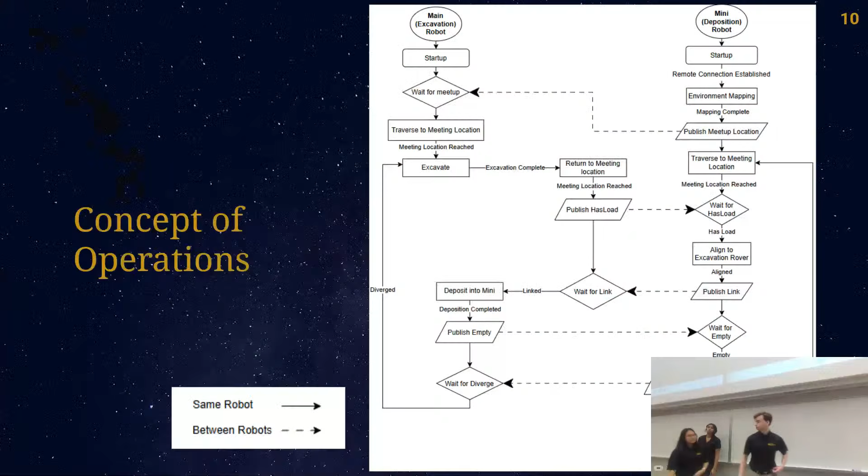Starting with the concept of operations, the reason why we're even doing 2 robots is because one can deposit and one can excavate at the same time. So this flowchart is just a high-level overview to bring what the software is designed for, and how the robots think, to everyone else so they can understand what's actually going on in the robot, as well as for anyone else, specifically NASA, looking at how we built the robot.

To go over the flowchart a little bit: the mini-bot will first publish the meetup location. The main bot will then meet the mini-bot at the meeting location before going to excavate. After excavating, the main bot will meet up with the mini-bot again, and then the main bot will continue to excavate as the mini-bot deposits the regolith into the deposition zone. This will loop until the end of the time.

Next, Systems has an integration plan and risk assessment. This was developed a few years ago, but we continue to use and update it every year. This is a great way for us to map out what we identify as our highest priority risks and lowest priority risks. Some of these are more operational focused instead of being very specific to maybe what a DFMEA does in identifying risks on a certain subsystem.

To go over the highest risks we've identified: shifts in the project focus. Obviously this year with the mini robot, there's a lot of extra work that needs to get done, specifically on integration of the 2 robots. So we identified this as a high risk with the addition of new sub-projects, trying to stick on the same timeline as we usually would have with only 1 robot, but now we have 2.

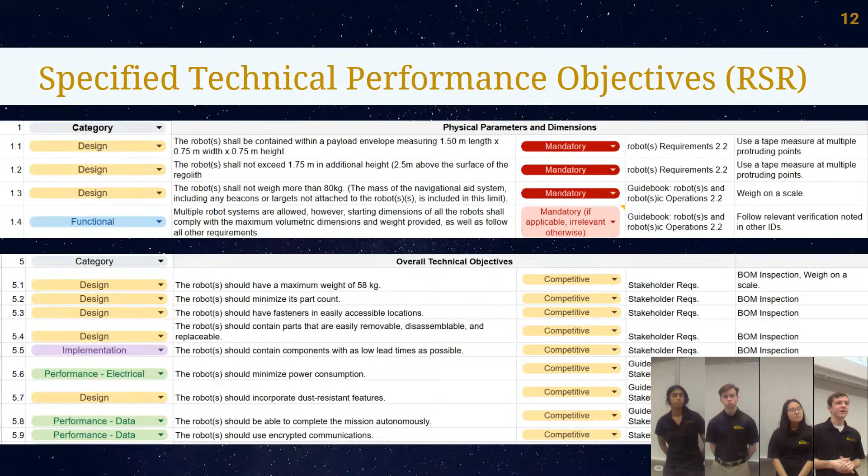Next, we have our RSRs, Robot System Requirements. These are the objectives that NASA set out for us, and we were able to extract and put into this Excel sheet. We also put in our own input and judgment designating them as mandatory or non-mandatory based on what the guidebook says. This is a way for us to organize our thoughts and what NASA wants from us so we don't miss anything. A lot of people have seen these and been looking through them because you need them to fill out the DFXs, checking if a certain part meets the system requirements. These objectives also help guide our TPMs, our technical performance measures.

This is a way for us to take those objectives and make them into a table that we fill out with our thresholds, our objectives for different measures, and the hard limits we have for those. For example, this is the one for the main bot right now. The total limit, as most people know, is 80 kilograms. For the main bot, we're hoping to get it around 50 kilograms so we can leave 30 for the mini bot. This is a way for us to make sure we are hitting those measures and not exceeding them at any point in time.

We update them at most major review points. For example, there's some at PDR, and we're going to have some finalized by the end of CDR for those measures. This is also really important because NASA likes to see how the robot evolved over time in terms of these objectives and technical measures. This is the TPMs for the mini bot.

It's mostly the same, there's a few changes. For example, the dimensions that the robot should be in and the mass. So I'll turn it over.

Currently we are at CDR, and looking forward, we have the test readiness review. That will be where all of the assembly should be finished up so we can hand things off to software to do testing and get that proof of life demonstration out there, which comes after TRR. This is something we will be sending to NASA, a video of our robot. And then after that, we have competition.

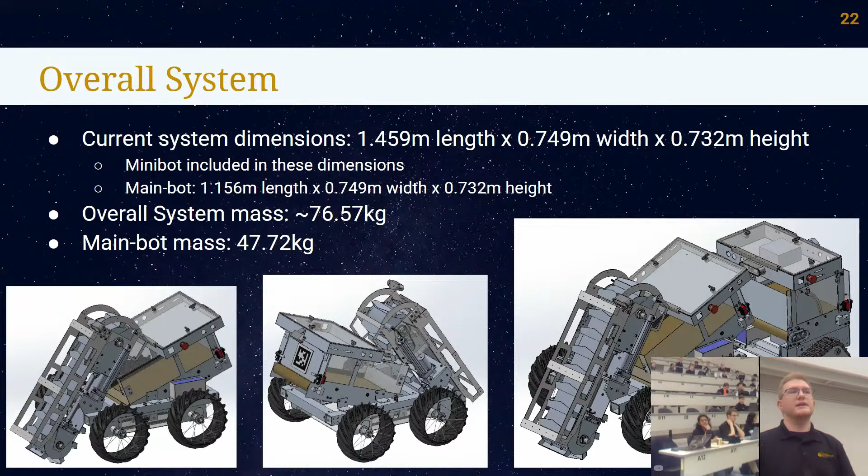We have 3 system configurations for while the robot is running during the arena. This is the starting configuration, so we fit within our maximum allowed stowed dimensions. Next is our mining configuration, where excavation extends downward so we can collect the regolith. And then our third is traversal, where the excavation system is raised up to provide additional ground clearance, and the mini-bot deposition flap, which we'll hear more about later, will open up.

Now I'm going to invite Will Dansdown, who has done a lot of calculations to justify the mini-bot in addition to our main bot. So we're going to talk through that.

Hey everybody. So in an attempt to justify this 2-robot idea, I took it upon myself to try to model last year's robots based upon this year's format.

What we did is I took the sample size of all the teams that qualified to KSC, or the top 10 teams at competition last year. I rewatched all of their best runs, which I determined by taking their total volume deposited divided by the time of the run. So if their KSC run was over 2 times the volume of one of their UCF runs, I would use their KSC run.

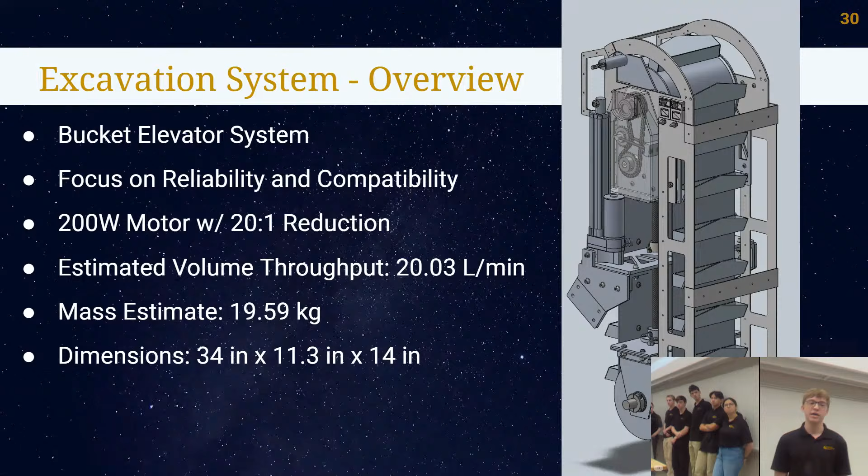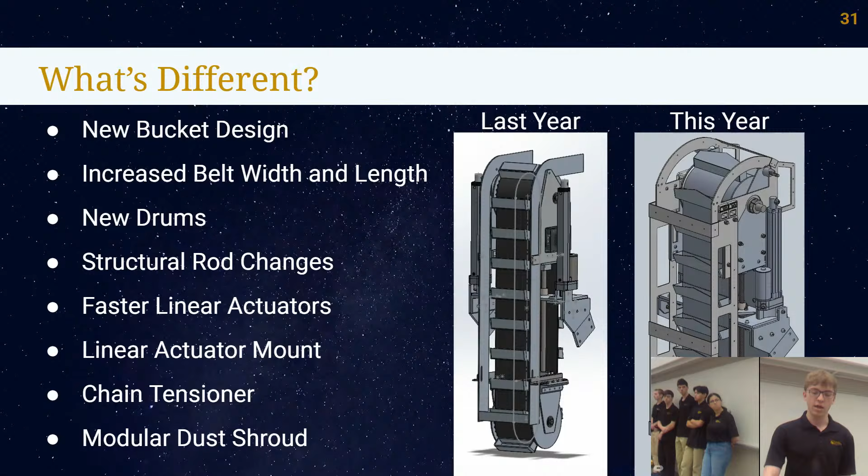There have been many comments that we look very similar to last year's robot. However, a lot of things have changed, such as a completely different bucket design. Our belt width has increased significantly with an increased belt length. We have a complete new drum design, a lot of structural rod changes, and we've implemented faster linear actuators. We've created new linear actuator mounts, changed our chain tensioner design, and updated to a modular dust shroud.

For the new bucket designs, compared to PDR, we decided it would probably be better to have a smaller footprint, and volume throughput is not as important as initially thought. So we decided to downsize the buckets and therefore downsize volume throughput. We also slightly increased the amount of buckets from PDR to somewhat compensate for the volume throughput losses.

The buckets are now still the same size as last year, same cross-sectional size, so 1-inch L channels, which is easy to source, and they're wider than last year. Again, we're estimating about 50% losses, so that's where our 20 liters per minute estimation comes from.

Here you can see the internal dimensions of the bucket, which comes out to just over 0.1 liters for our overall internal volume. These are built with the thicker L channel in the back and then a thinner piece of sheet metal. If you look closely, those pieces are overlapping slightly to help with making our welding easier and stronger. All this comes out to about 0.1 kilograms of weight, so totaled over 18 buckets, that's about 2.04 kilograms and 1.89 liters of total volume.

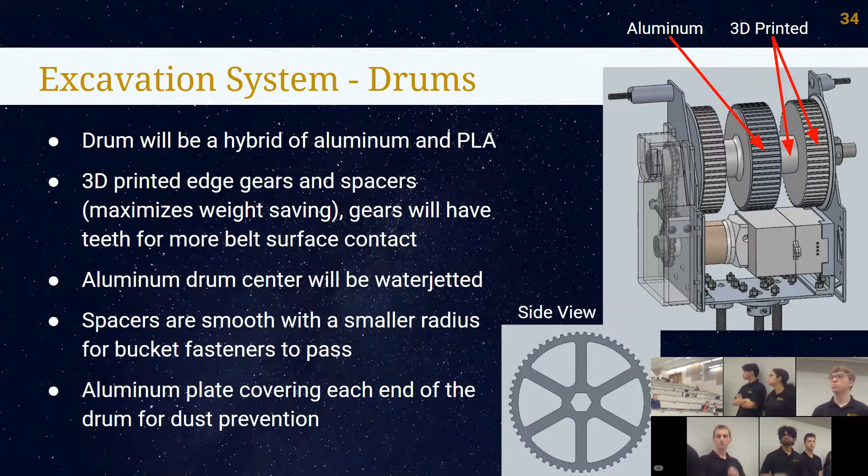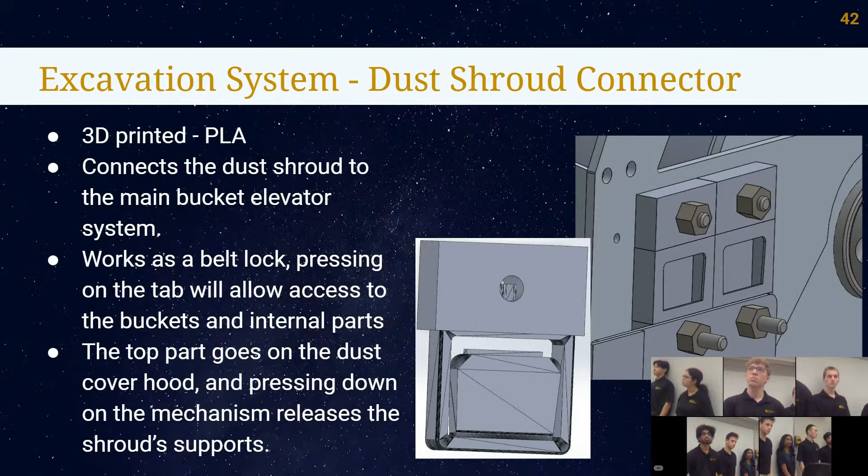I have a question regarding the X rod. I know you were mentioning reducing the weight with carbon fiber. What was the reason against doing that? Was it the manufacturing of it? Carbon fiber for the X rod?

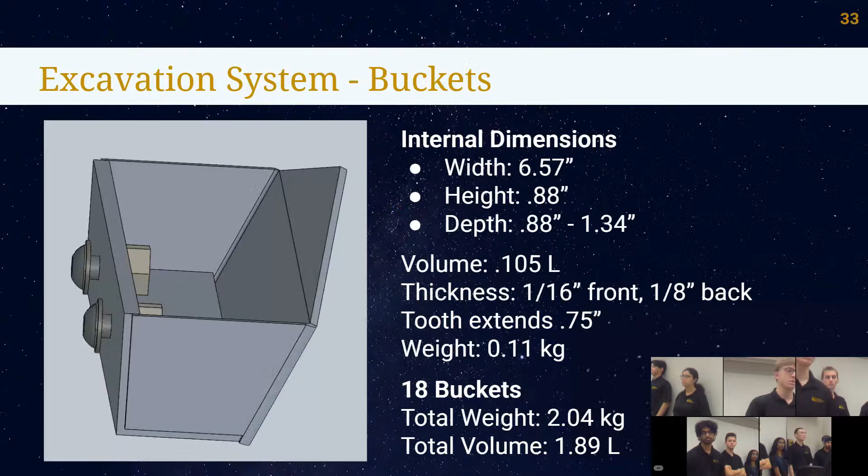The original idea was to make the center part, the X, carbon fiber. The factor of safety is about half of what it would be for steel. This is experiencing especially high force, and we don't want to put carbon fiber under this kind of load. The strut rods run vertically, but this one runs horizontally, and carbon fiber usually isn't good for that kind of application - you don't want to put it under that load. That's why we steered away from it. These two weigh a decent amount because they're steel, but they're sturdy for a reason - this is probably the point where the robot experiences the most stress.

Is this the part going straight into the ground, actuating down? For some reference, I ran calculations, and a 3/4 inch carbon fiber tube I found has about the same strength as a 1/2 inch steel rod, which we already had concerns about bending and breaking over time. So the factor of safety is less, and the data we have shows it's not quite strong enough - it'd be weaker than that.

I think the failure mode, especially when the steel was bending, I can't even imagine with carbon fiber where it starts cracking - that's a lot more of an extreme failure mode.

I have some questions from Julian from the Slido. First, how are you getting the motor in? It doesn't look like there's any holes inside. The motor, I believe, we will attach and put onto the plate prior to assembling the two plates together, so we'll be putting the motor onto the plate prior to assembling the top drum assembly.

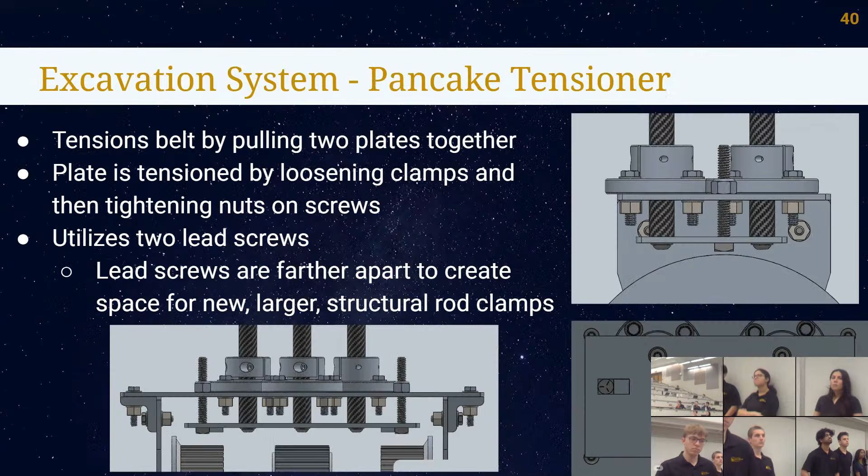Kyle, you've talked a lot about using carbon fiber tubes for things. Have you looked at using steel tubes? Yeah, we actually have, for the strut rods we're just trying to save weight. I do have factors of safety in my spreadsheet, including a factor of safety for a steel tube. It's just for the sake of weight saving that we've started applying carbon fiber. We've gotten to the point where we're looking at putting weight-saving holes and doing random things to shave weight, so it's been a battle for every gram.

Yeah, obviously I'd be more comfortable using steel than carbon fiber, especially when stress is applied, but it's just been a challenge. I would personally be a little concerned about using carbon fiber tubes in compression here, because carbon fiber kind of sucks in compression. Yeah, these aren't tubes for the strut rods, they're solid, but yeah, I agree.

Yeah, I can share with you the Excel. The factor of safety was actually fine too when it was like a tube with like 1/8 of an inch wall thickness, but these are solid for now. So yeah, I agree with your concerns. These are concerns we've been thinking about since we began thinking about using carbon fiber. The calculations show that we should not have issues. However, Sophia can send you the calculations to ensure that.

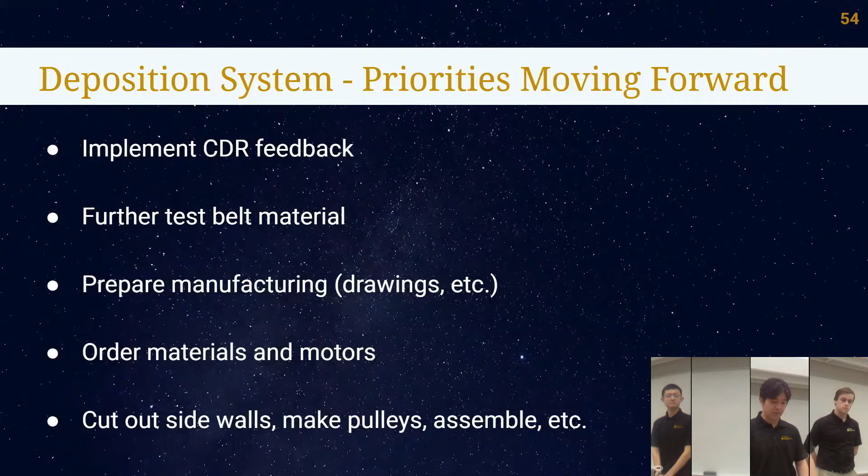Are there any questions? From your dust sealing, you've got little rubber beads. Are you concerned about extra friction added to the belt? Not particularly. Potentially, but the rubber is only a 1/16 of an inch thick, so we don't expect it to generate a large amount of friction. And even if it is, the belt is not the most sticky thing in the world, so hopefully it should be fine. And if it is, last year's testing showed the motor was not drawing particularly much power to actually turn it, so even with a little more friction, I don't think it'll cause a larger problem such as a motor stall.

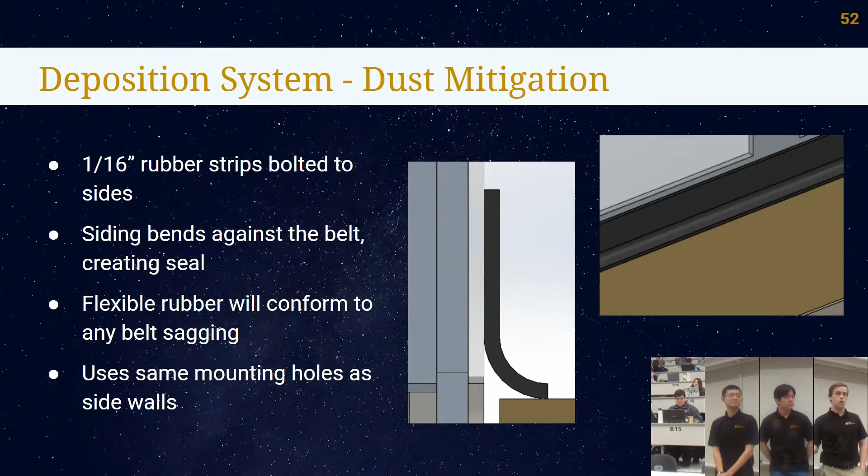And on your chain, how are you planning on tensioning that? The chain is planned to not have an external tensioner. We've just spaced them very carefully such that there is slightly less distance than would perfectly take up the links. This shouldn't be a problem. Worst case scenario, given how much wrap angle there is, even if there is some sag in the chain, that just means there's a slight delay between starting up deposition and it turning, and we don't foresee this to be a large problem.

Are you concerned about it being too tight and being unable to put the belt on? We can double check, but right now that hopefully should not be a problem.

Going to the gate, how much force is it going to take to open this gate, and have we tested it, or are we concerned about that? So we have tested the gate, not obviously in its full design, but as much as we could based on last year's system, and it seemed like the regolith had no problem pushing open the gate, even when we tilted it as much as 30 degrees.

Is that going to affect how much you can fill deposition during excavation? Hopefully not. This is the same basic plan we've had the whole time, in that the gate will be held closed and the regolith will still be able to pile up against the end of it. We have latches holding the gate closed, we pile the regolith, then we open the latches, and the belt pushes the regolith so the regolith can push the gate open.

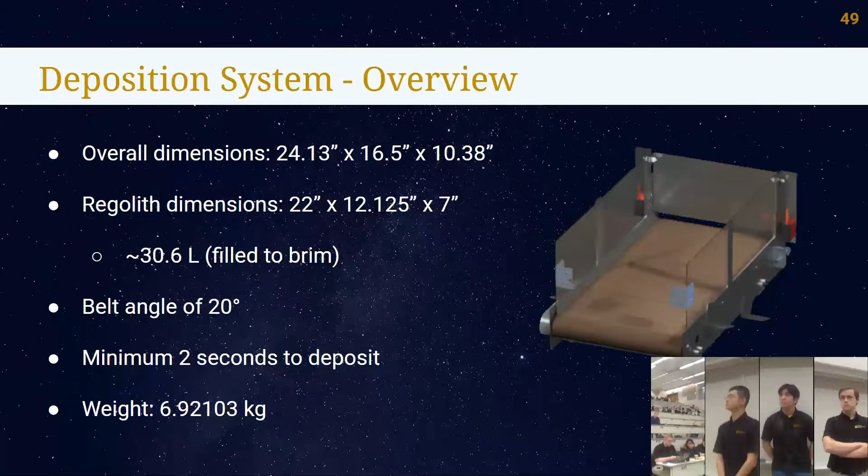Another question: whenever I think of the conveyor belt moving with the deposition at an angle, I foresee it becoming an issue that instead of it piling at an angle, it ends up piling in a triangle fashion where it levels off at the top of the conveyor belt. Is there anything that would cause the material to actually come up to fill that gap?

I can actually answer this. We did do a fair amount of testing with our old robot, Reggie. The belt angle was 20 degrees, and we tested up to at least 45 degrees on Reggie, and the belt just stayed the same shape. So not the same performance with this cotton fabric.

With the cotton fabric, that's one of the things we need to test about this. There are ideas on how we might apply various coatings and sealings to increase its friction if we find the regolith is slipping on it, although I don't suspect that to be a large problem.

I think what you're saying, in short, is that you don't see how it would pile up vertically any higher than where the conveyor belt is. So the answer for that is just going to have to be the motion of it being pressed up against the gate, inherently pushing in more underneath it, which then lifts more stuff up, and more regolith comes in underneath, lifting it up, and then it falls backwards and fills the shape. That's another thing that really needs to be tested.

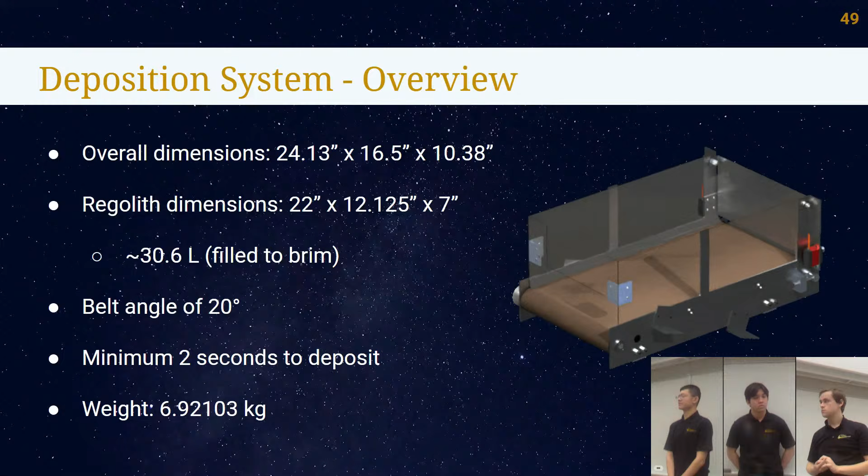I don't think we can know sort of how the regolith will behave in that manner. There's also the idea of running the belt just a little bit slower to distribute it a little higher.

Question from the Slido from Julian: did the deposition gate use a solenoid instead of servos? Potentially, I don't necessarily see. I can't think right now of where the solenoid would be placed, or necessarily what the benefit of that might be as compared to the servos.

We can look into that after CDR. I'm having a hard time understanding where the solenoid might be in this moment. I imagine it's like a latch or something, like it just extends and pushes out. That's like a space thing too.

We could maybe. The good thing about the servos is that they're quite compact. We might have to expand the bars more out to the side in order to fit the servos, or fit the solenoids, or make some other sort of mounting. I imagine the driving requirement might be mass.

For the gate, is there anything to prevent the regolith from slipping underneath the gate and out the back of the robot? I've thought about potentially taking more of that rubber siding and slapping it on the bottom to try to make a seal, or just having a tight clearance. Even if it does slip under, we suspect that the amount that goes underneath would be quite small.

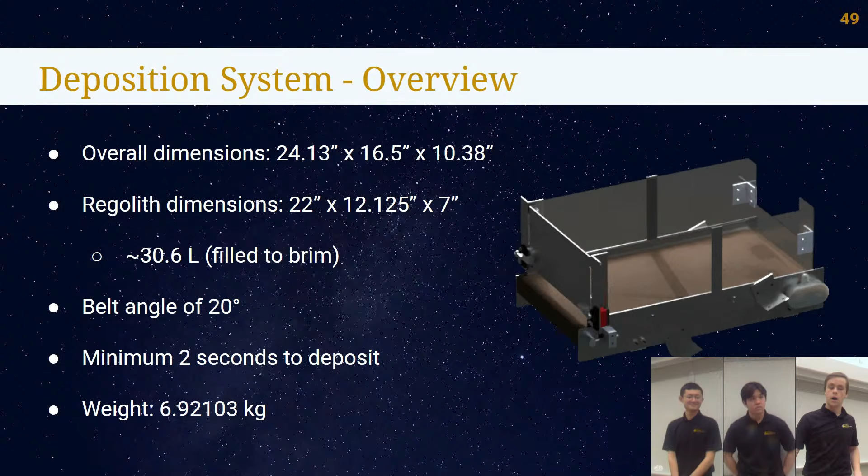Yashas asks: How are the servos mounted? Sorry, it's hard to see. This might be an old image, but there are 4 M4 screws that hold them in.

Sophia asks about our pulleys' weight. I think a little bit less than a kilogram each. Yeah, the pulleys are pretty heavy.

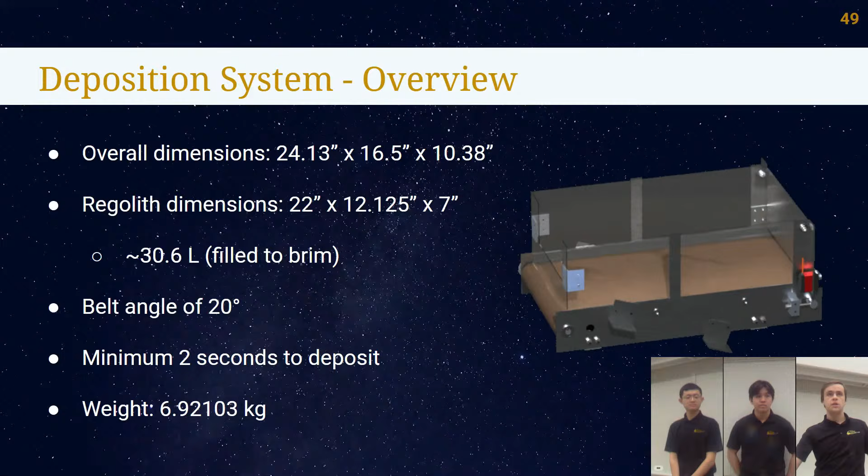We're going to try to look into some more potential weight saving for that by trying to reduce maybe the inner diameter. It's hard - the pulleys are very important for the system, and they're just necessarily long tubes of something, so that's a lot of volume. So we're looking into ways to try to reduce the weight cost from that.

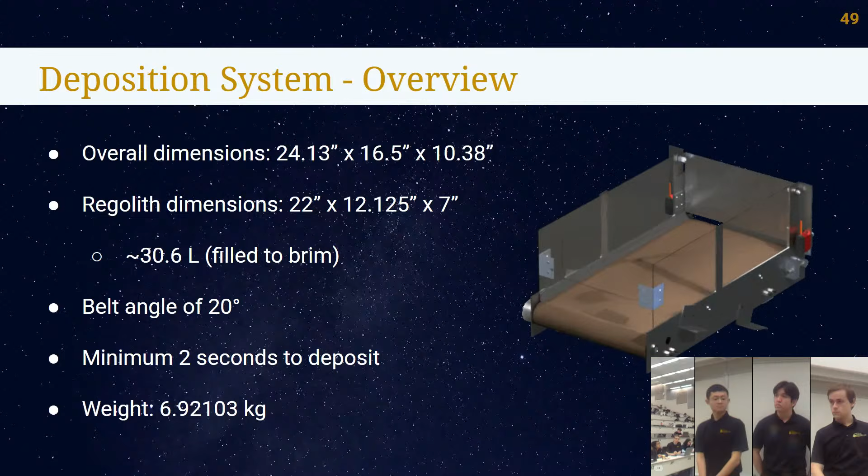Also on the pulley, I believe you talked about PDR, but I believe you were planning on making those pulleys convex or concave. Yes, convex. So the pulleys are no longer to be actually properly crowned, meaning they will not have an arc on the radius.

They're instead going to be sort of trapezoidal pulleys. So there will be two straight parts going into the cross section on the outside, sort of a trapezoid, which wildly improves manufacturability of these pulleys.

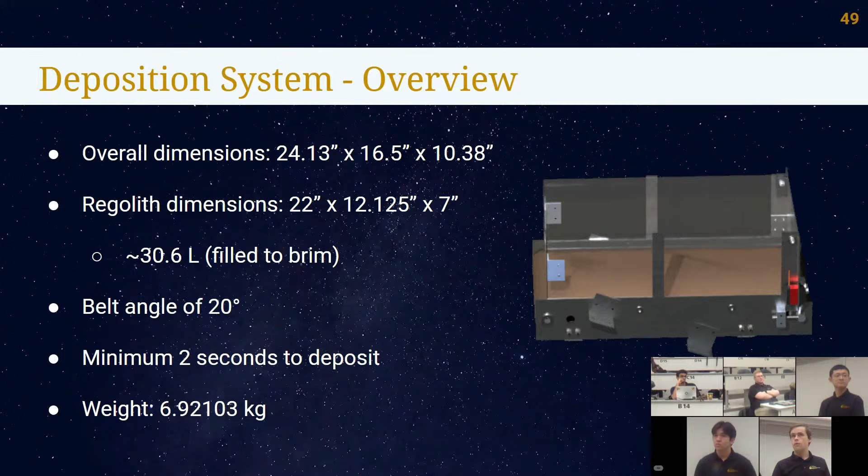You plan to manually make them? Well, right now we're still debating between manual and CNC processes. Potentially either, depending on what's more available to us at the time.

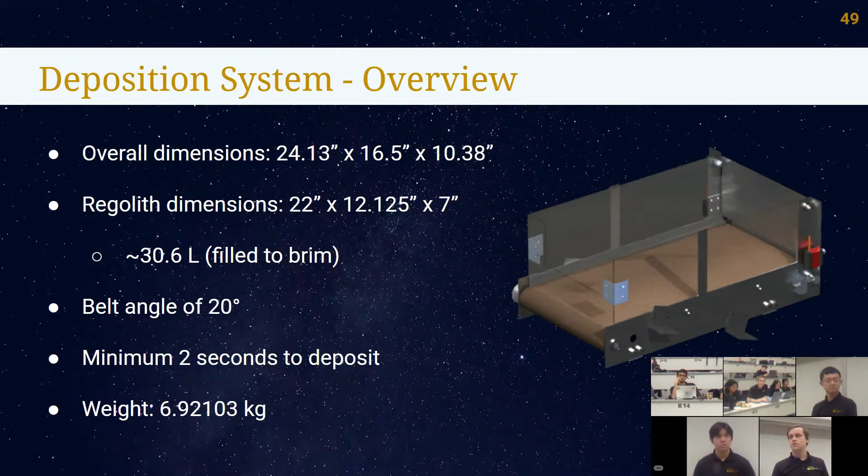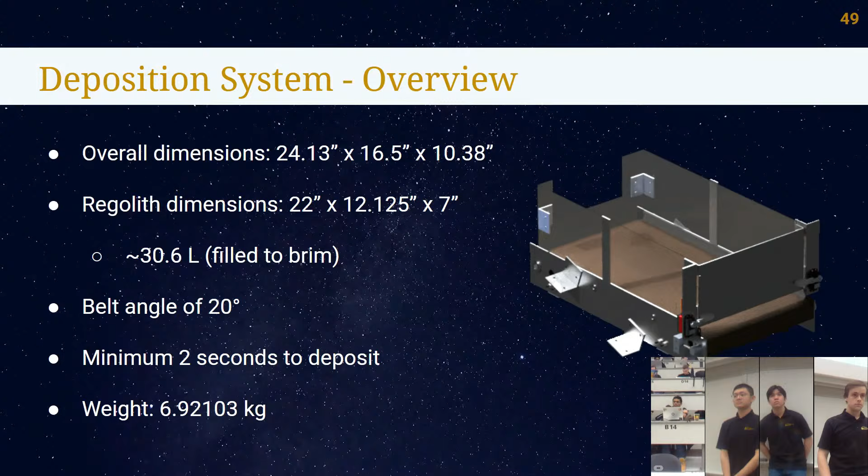Is there anything else for deposition? Yes. Are you concerned about regolith out from around the gate, or is that small enough that you don't care? I don't think we're too concerned about regolith leaking out from around the side of the gate.

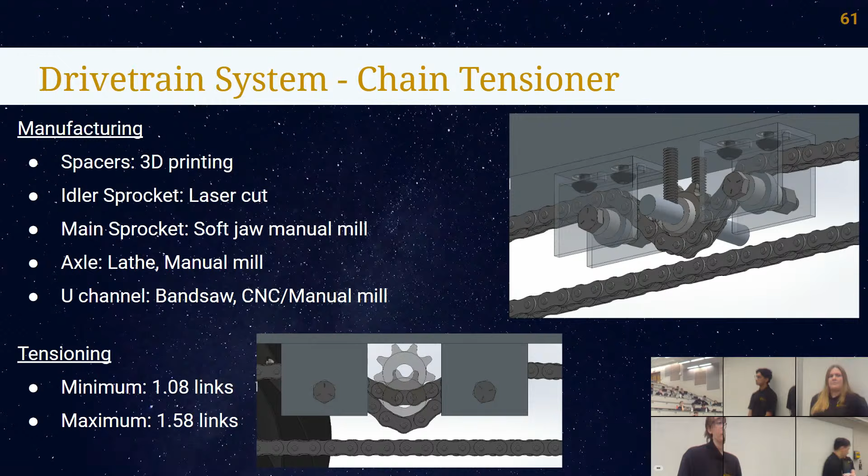What's your question? Could you provide some more information on the guards for this? That includes the chain guard - the material, thickness, dimensions, how it's manufactured, how it's mounted - as well as the skid plate.

So we did not have a slide for that, that's probably something we should have added. The skid plate thickness is 1/8 inch polycarb, made either with water jetting or laser cutting, both would be possible. For the chain guard, we'll also use 1/8 inch polycarb, either water jet or laser cut. For the 90-degree bends, what we discovered last year is if we use a heat gun to heat up where it will be bent and then bend it, we can get much more accurate bends, and they don't get cracks and pressure points in them. So we'll do that process to bend them at the different marks for both sides.

Those were the two things. Was there another one you mentioned? Yeah, where are each of those mounted?

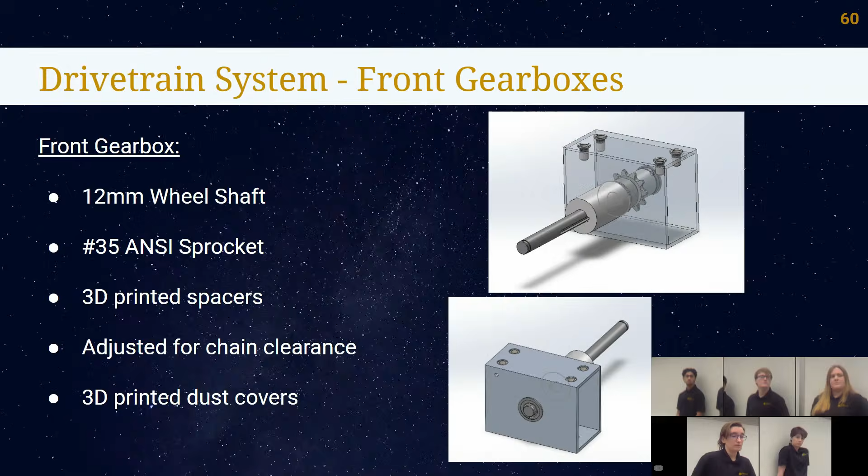Okay, so the skid plate is mounted - does the mount show up on there? Yeah, okay, so the skid plate is mounted to this hole down here, and that is mounted to the front and rear gearboxes. And then the chain guard is mounted to these top two holes. For those who remember the Masterlink issue from last year, the screw that was switched out was too long - it was for top and bottom, but it was the bottom screw that was breaking the Masterlinks. So by removing those holes and making sure only the shorter screws can be used in that spot, it should completely remove that issue.

Alex: two things. One, I sent that one of the rod nuts is 60 thou away from the chain.

In CAD, very close. That'll warrant more investigation. Yeah, I'll look into that. I sent photos and drivetrain.

The other thing is, so to my understanding, the skid plate will run entirely underneath the robot, including underneath the chain guards. The skid plate does not run underneath the chain guards. The skid plate has a cutout section here for the chain guard to fit in. So when the chain guard and skid plate are next to each other on the bottom of the robot, they'll be parallel and look flat, but there's a cutout section for the skid plate.

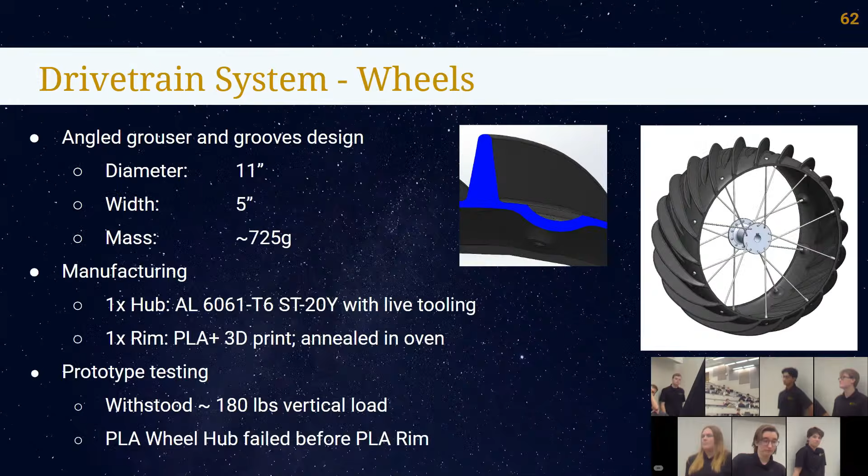I still don't believe tolerancing will be an issue, but when we manufacture them, we will definitely have to be very careful of the tolerancing, as well as in the manufacturing plans, which I know aren't on any of these slides, and I'm probably the only one who's read them so far. Oh, I don't know what I hit. I'm very sorry.

In the manufacturing plans, we do leave plenty of time for these to get done. So if we make them and discover there's a tolerancing issue, we would remake the part.

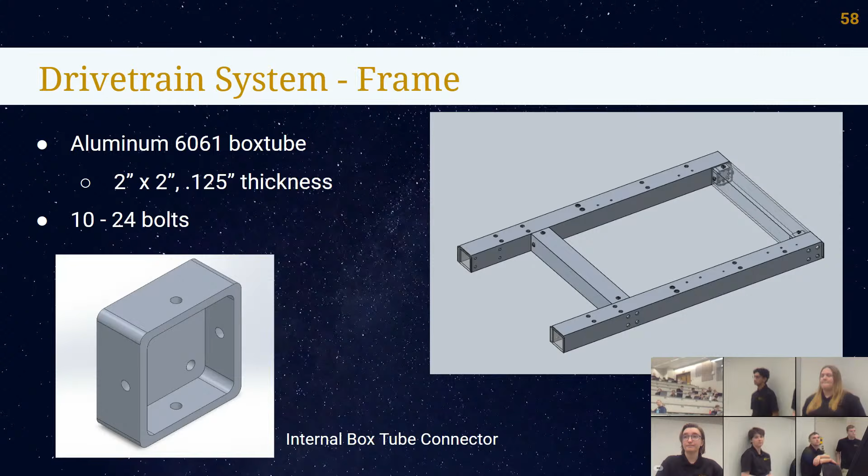One more question, then we'll move on to power and hardware. Okay. Did anyone else have their hand raised? Question: what material are the handles going to be made out of?

The handles physically will probably be PVC, because that's very easy for us to adjust. If there are concerns about PVC bending, we can look into other things, but personally I don't think there will be. I've done a lot of very heavy things with PVC pipes and never had them break on me, unless they froze — but that should not be a concern in Florida.

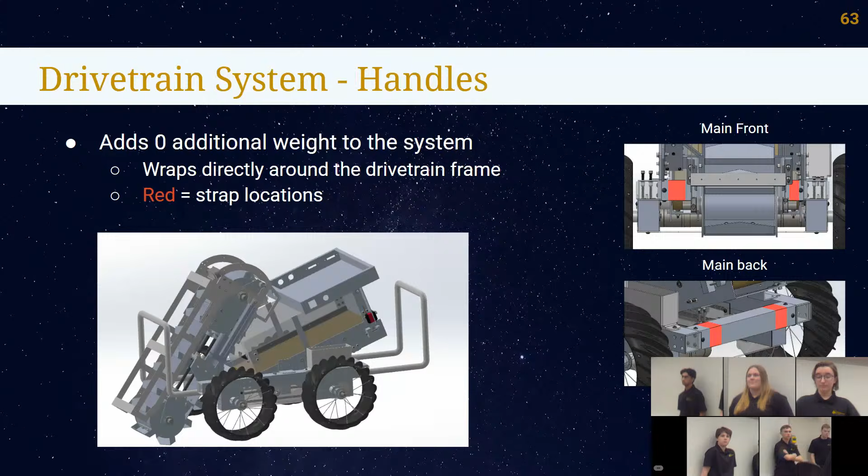Okay, alright. Thank you, drivetrain.

We got the debate. We are the strongest, the Power Rangers. Power and Rangers. We got the pictures of Homelander. I'm so disappointed. Okay, we also have — okay, hello, we are the Power and Hardware subteam.

The basic overview of what we'll be going over is first, system architecture, then our PCBs, and then general box design.

The basics of system architecture: first to note is that we're using a 10 amp hour battery, which is sized down from last year's. This is good for weight saving, and we double checked with numbers from last year that this will be sufficient for us for the main bot. The main thing to note is that as per regulations, all the power flows through the E-stop and the battery is monitored through a power meter. Other than that, most of the system architecture is dedicated to making sure that our power is safely and effectively given to all the sub-teams that need it.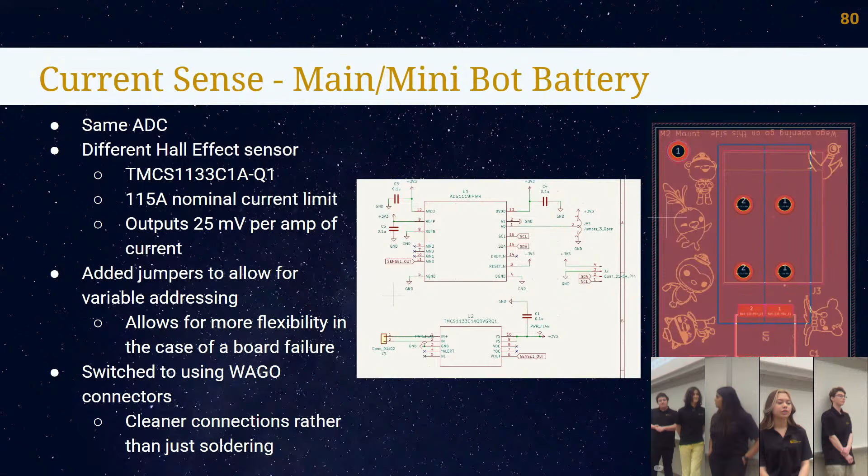This is our alternate mini and main battery design, which is a shunt resistor based system instead of the Hall effect. We're using the INA254, which has a 75 amp nominal current limit and outputs 40 millivolts per amp. Same as the last one, we're using Wago connectors and jumpers.

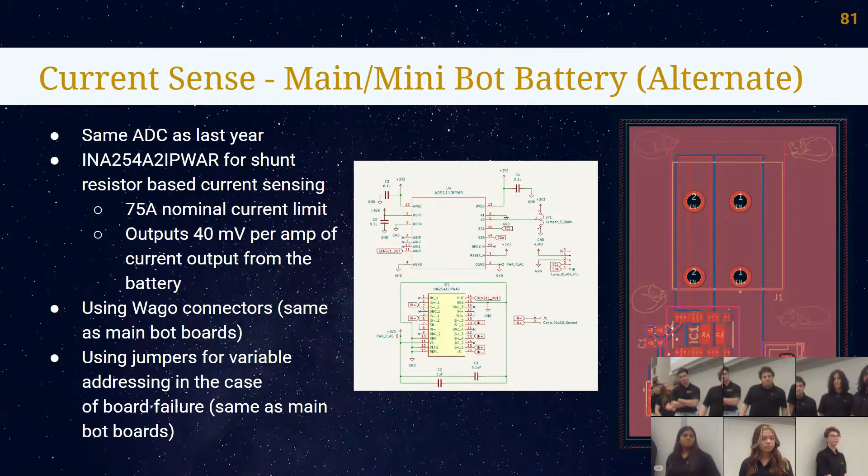We also have current sense boards for the linear actuators on the main bot. This is the design we plan to move forward with. It's essentially the same current sense board as last year, using the same ADC and same Hall effect sensors, and the same Wago connectors for power wires as the battery boards. We changed the I2C address on the ADC since there will be two current sense boards on the main bot. Otherwise it's essentially the same board as last year.

Similarly, we have an alternate design using shunt resistor ICs for the linear actuator current sense board as well. We do not plan to use this board on any bot, but it will be ordered and manufactured just in case something goes wrong with the planned Hall effect sensor based design. This uses the INA250 A2 IC with a 15 amp current limit. That's really the only difference between this board and the other one.

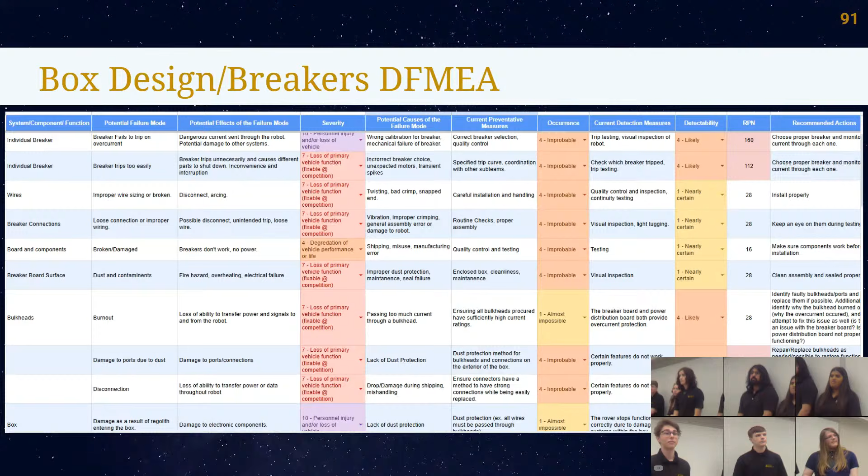Yeah, I had a question about your breaker. Let's start here. What is connected to which breaker?

Each breaker has the same footprint, so it doesn't matter which of the current ones you choose during soldering. For example, the top one could be for the actuators and the bottom one for the software computer. I'm concerned about what is connected to each one. Are we running all the motors through one breaker? I don't know what is running through any of the breakers. What downstream components are being powered right now? It's just both actuators at once, since I assume they're both being powered at the same time, and the power to the software computer.

Which breaker is covering the software computer versus the actuators? Bottom breaker is software, so these two. Size-wise, the 5 amp versus 10... sorry, 10 versus 15. The 10 amp is for the main bot computer and the 15 amp is for the actuators.

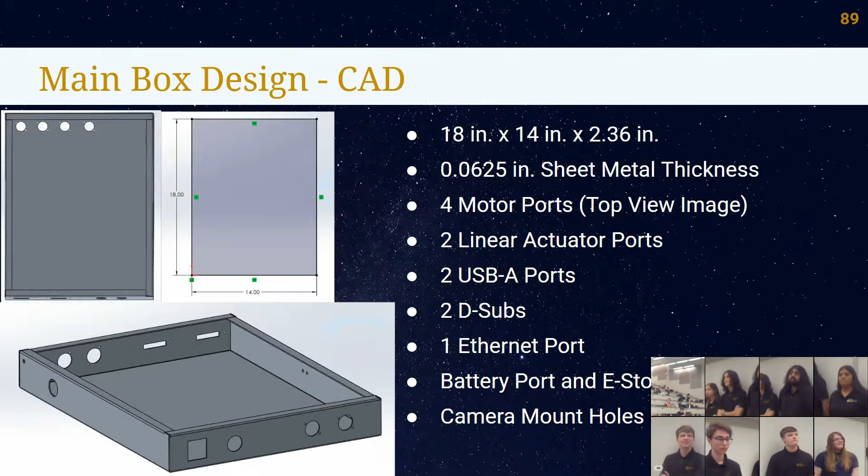Another question from the Slido, from an anonymous user: they see a lot of undersized power traces that should be zones, mainly on the battery protector. I wish I could tell you that... I also have the same concern. On battery protection, to my knowledge, all of the robot power has to flow through the battery protection circuit. Not a single one of those traces is sized to carry the 30 or so amps of the entire robot at full load. This one is better, the other one has super tiny spindly traces everywhere. And I am very concerned, as is the anonymous commenter, about your traces burning.

I was planning on fixing that trace. I didn't get a specific size of the traces when I first made it, but I'm doing more research on that. We're going to make the traces a lot bigger and possibly make the PCB slightly larger, and also have a ground plane to dissipate the heat a lot more and handle the power better.

I am more concerned about this when it goes on. There appear to be unrouted traces in the core. You cannot see them from here, but if you zoom in on the slide, there are a pair of unrouted traces.

I assume those would be fixed. Yeah, at some point. Also, there are two battery protection circuits. Are we using both of them? Are we using both in series or in parallel, or are we only using one? If we're only using one, which one are we using? For which battery protection? There's the 555 timer and there's the BQ series. Which one are we using? Are we using both, or just one?

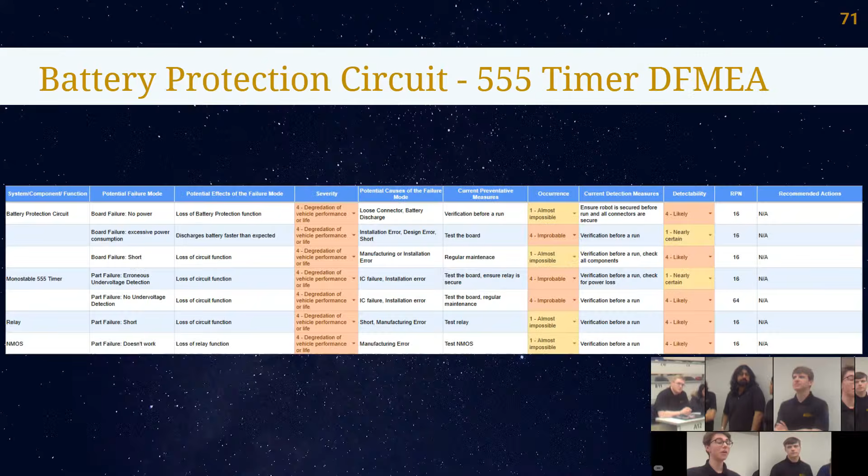We're planning on manufacturing both and testing both. What it comes down to, which one we typically are going to use, is going to be down to testing. In theory, it would be the BQ77915. But again, we are planning on manufacturing both and testing both, and things can happen during testing that we can't predict, and we might end up using the 555 timer. But that mostly depends on how testing and manufacturing goes for both of them.

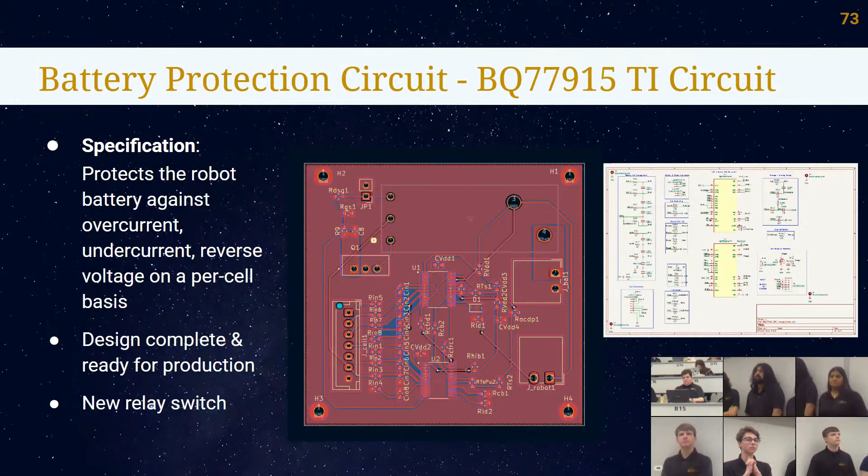For the box design, we are required to have external antennas, so I would definitely recommend adding those as we move forward.

In regard to pre-planning where all the holes go before we send out the box, with all your alternate board designs, would all the mounting holes be in the same placement, or would we have to plan for variable holes? Yeah, that is another reason why I might hold off on some mounting holes. I can see the merit in adding some of the more firm ones beforehand. For example, potentially the 24 to 48 converter, we might be able to add mounting holes beforehand for that, because we know exactly what we're going to use for that, and the dimensions and whatnot.

We do have what we plan to use set, which is the Hall effect sensor for both the actuators and the battery. So if we really wanted to, we could plan for those holes, but to my knowledge they're not the exact same size — someone from Current Sense can correct me on that. The Hall effect versus shunt, they're not the same size board. No, yeah, they're not the exact same size. So again, I might want to hold off on that.

I was personally part of the post-drilling holes last year. Obviously it is a little bit of a pain, but it's not undoable if we do need to add holes after ordering the box. It is a pain, but it's 100% doable. It's not the biggest pressing issue we would have, but it would be nice to have it beforehand.

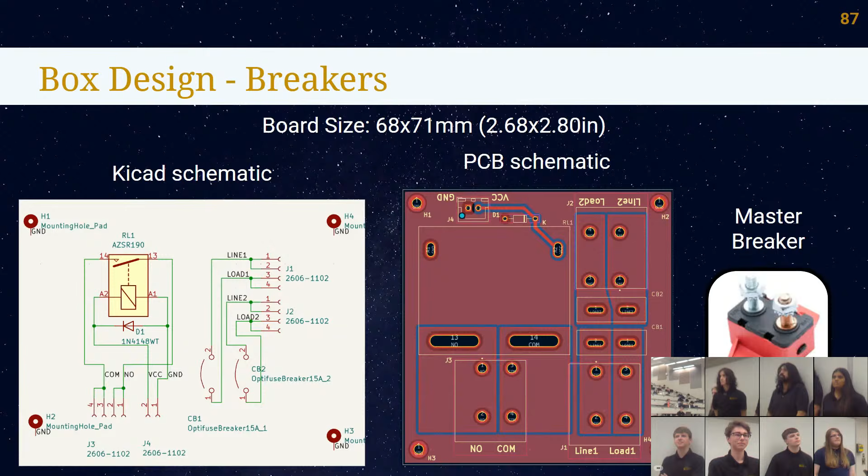I have a question about the PNC board. You mentioned using a 24 volt to 5 volt adapter on your schematics, but you don't mention it here. I assume that is powering the PNC or the peripherals around the PNC? The PNC is powered by the USB cable.

How are you ensuring that the 5 volt signal from the Jetson and the 5 volt signal from the 24 volt to 5 volt converter do not mix and can never mix? It should be fine — the 5 volt signal from the Jetson should be coming through the USB. I believe the traces are all separate, but I will double check to make sure. I appreciate the concern — that's how we blow up Jetsons. Yeah, of course. I'm almost positive that I accounted for that, but I'll go through and double check to make sure.

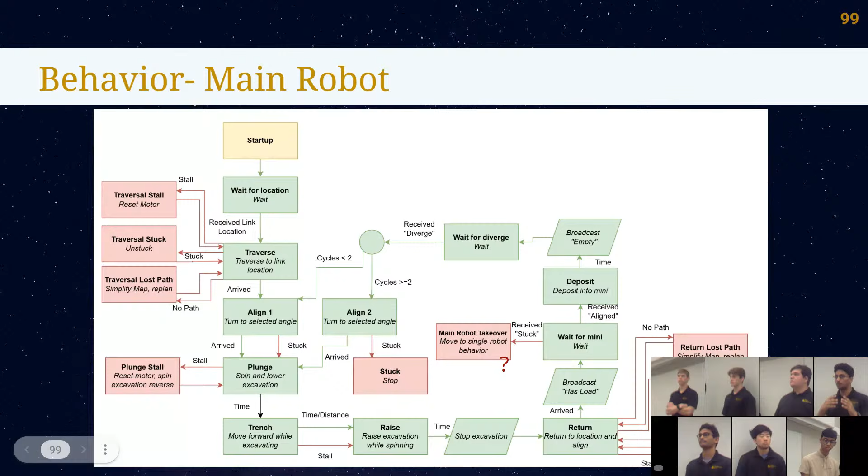One more question: the camera mounting, you have one on the back and one on the front. Yes. Where are your blind spots? Yeah, so the blind spots would be on the corners essentially.

We don't expect this to be a major concern with this robot because it's going to be staying in the excavation zone, where we're allowed to essentially hit the obstacle. Hitting obstacles doesn't lose us points as it would with traversal. Additionally, it's going to be moving fairly slowly — it's not a very fast machine. So we wouldn't be concerned about turning into an obstacle and going very fast into it or anything.

Okay, so given that we don't have this LiDAR yet, are we going to use it this year? We still anticipate and are hoping that we'll be able to use it, but we're not relying on it, and we'll talk more about that. LiDAR is actually only going to be used on the mini.

Process. Curious what that looks like.

So I think it would behoove us to do some pretty preliminary analysis and print out an explicit flow chart: this is the state, this is the decision we should make. So that in the control room, if and when something goes wrong, we don't lose any time in discussion. We just look at the flow chart and go, this is the state, we have to do this, we've done this.

I think this would be a great thing to work with systems on. Any other questions?

So what is this wait for mini on this main diagram? Is the main model fully stationary during that position, or is it actually moving while guided? We'll have a lot more details on that when we get to the minibot section. Basically, during the link-up procedure, when they get close together, we take a lot of steps to make sure they're not moving at the same time, because we really want to avoid them hitting each other. There'll be more details on that.

A question from Eric Reiners in the chat: what is the location accuracy between the two bots? That is still yet to be tested. That's still something we have to work on with two separate systems, testing that, but hopefully coming soon.

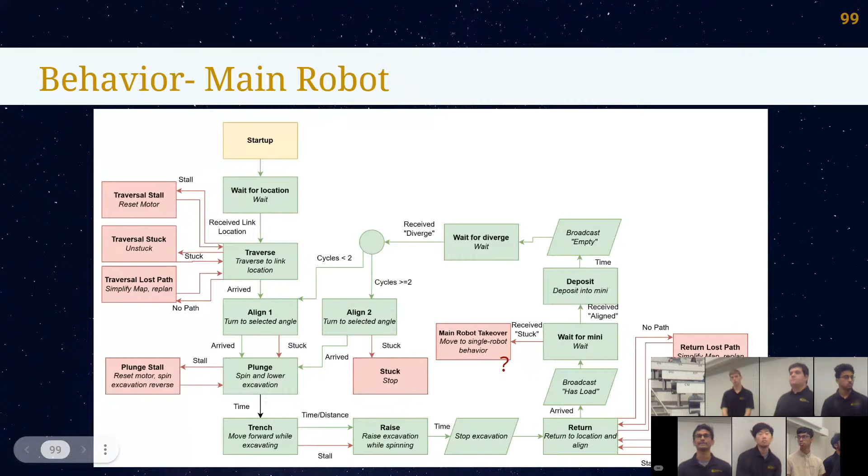One more question about YOLO. We know that Jetson is fairly limited in terms of processing power, as you've demonstrated in iso proc and also just many times incrementally. Where do you find the processing power to run a YOLO model on? Right, so Isaac ROS actually has packages to run YOLO models and machine learning that people have had some success running on a Jetson Orin Nano. So we were kind of using that as inspiration, like, if they were able to get it working, why not see if we can. It's still up in the air and will depend on our final testing, but that was kind of the impetus.

Also, the minibot would be doing the primary mapping of most of the obstacle zone, so it has a much more powerful computer. That is where the processing will likely go.

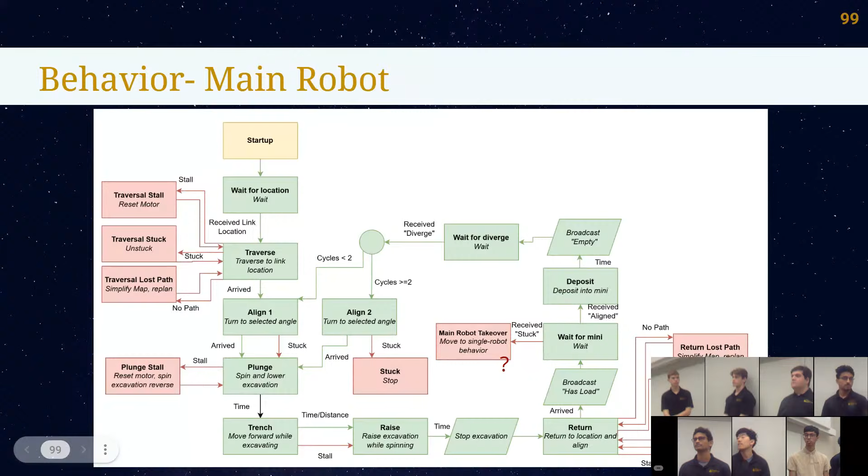That's it, I think we're done. Hand it back over to Hans. Thank you, software.

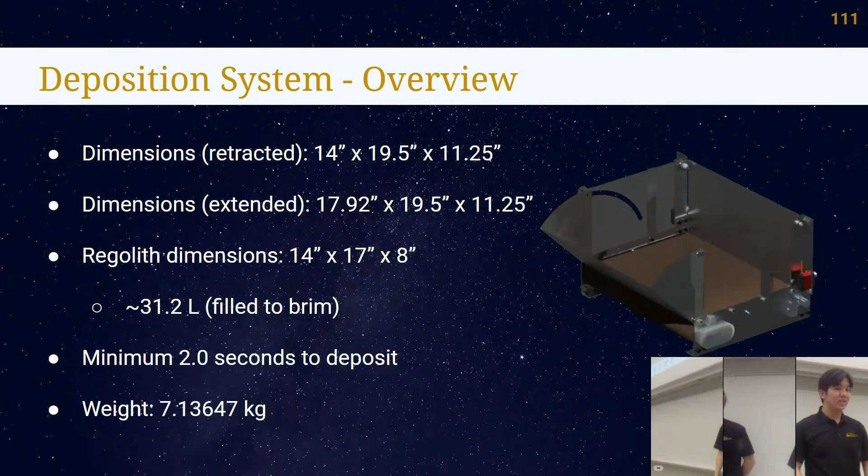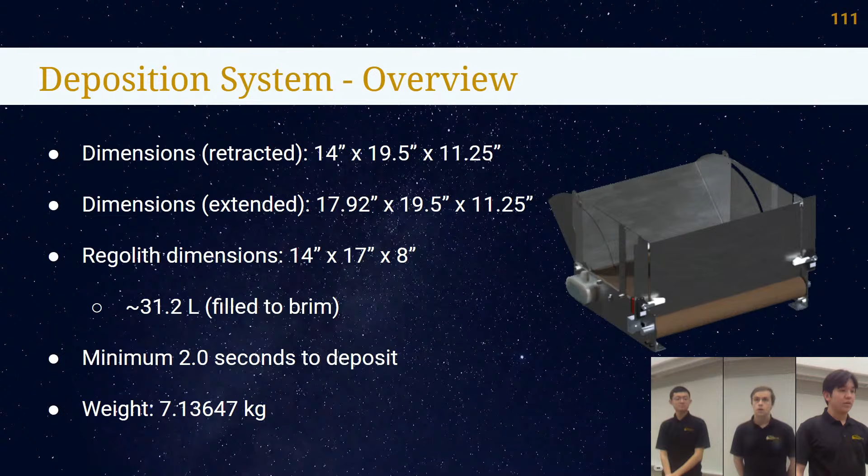So the dimensions kind of vary depending on if the door's retracted or not. The retracted dimensions are around 14 by 19 by 11 inches, and when it's extended that length goes up to 17.9. It can hold up to 31.2 liters when filled, which is a little more than the main system, and takes around 2 seconds to deposit. The overall weight is around 7.1 kilograms.

As mentioned, the deposition system has a flap which will extend at the start of the match. The flap is going to pivot around at the front to fold open and expand our carrying capacity. As you can see here, this is the flap retracted, so this is how the robot's going to start, and then a rubber band will pull the flap open into this position, where it will remain for the rest of the match, following a 68 degree arc, and it's going to end 45 degrees outward.

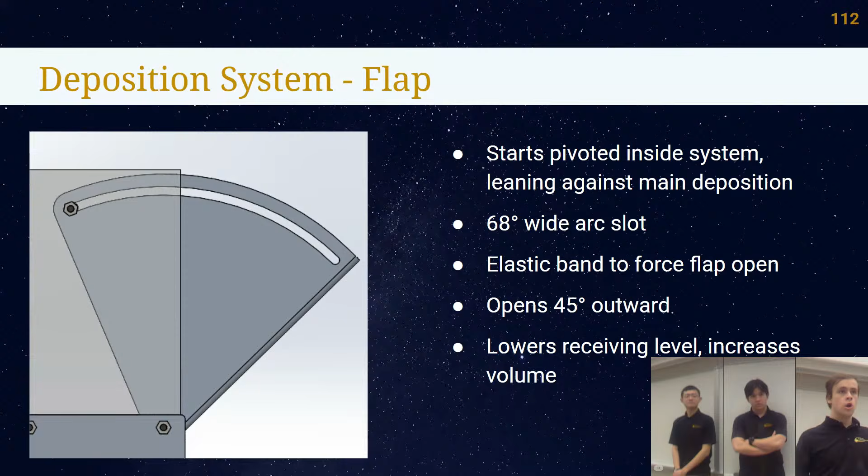This does a couple of things for us. It increases our storage capacity, and it also lowers the receiving level, which means that we can make the main deposition a little bit less angled, while still being able to keep plenty of regolith in. This piece here is currently planned to be made out of a bent piece of aluminum.

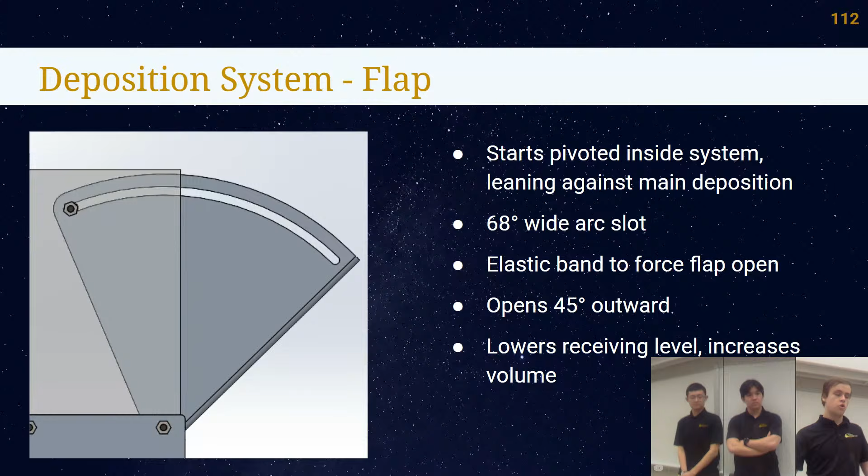For the DFMEA, this mostly just deals with the flap and possible issues with that. We're not too concerned with it, seeing the RPN being pretty low in its values. It's mostly like if the rubber bands fail, or if the door breaks somehow, or regolith gets somewhere where it's bumpy. It's kind of the similar things we've talked about in the main deposition and how we mitigate that.

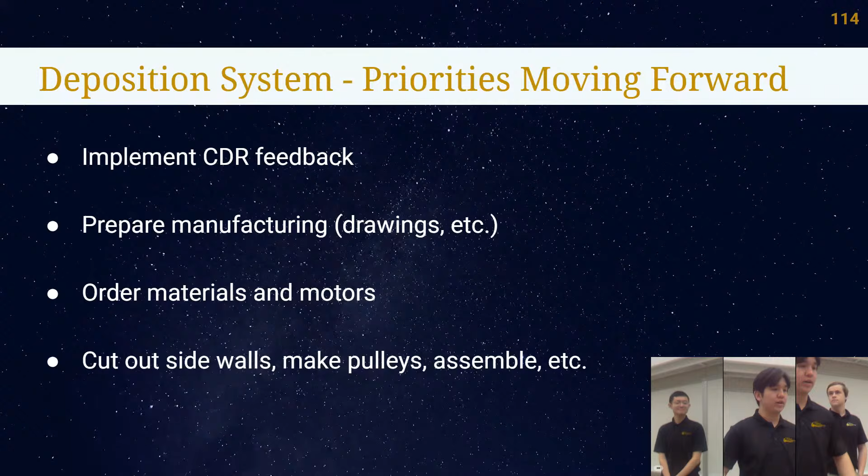Our priorities moving forward are, with the main system, to implement any feedback we get from today, and then prepare for manufacturing with drawings and things like that, and then ordering parts and assembling. Are there any questions?

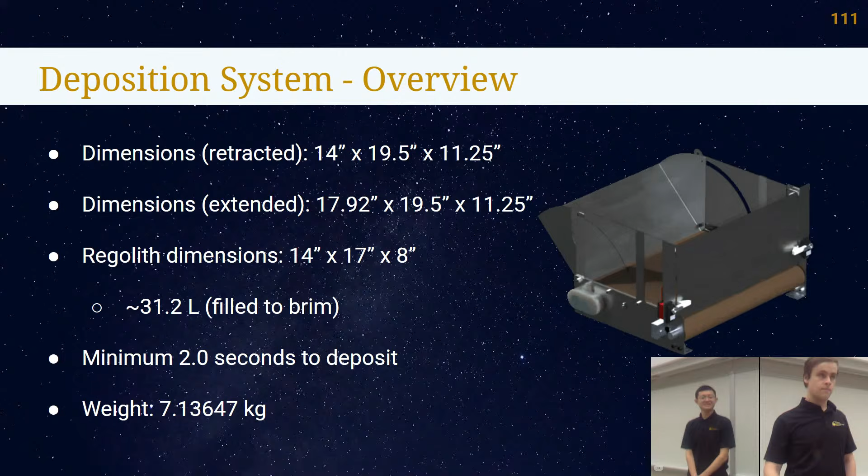Emily asked about the first slide, where it's rotating: is the curve cut inside the wall? That's an old rendering, slightly outdated - we made this change last night. There's only a curve on one side. The curve will be cut into the flap itself. So the second slide is accurate, and the rotating rendering is inaccurate with the slot.

Ankur asked where the elastic band goes. It's not really depicted. The elastic band is going to go from down here on the flap to the pivot point, with a bolt basically acting as a wrapper. It's going to be literally held in, always trying to release, but held back by being next to the main robot. The main robot deposition system will hold it closed, and as soon as we drive away, that obstruction goes away and it'll fold out.

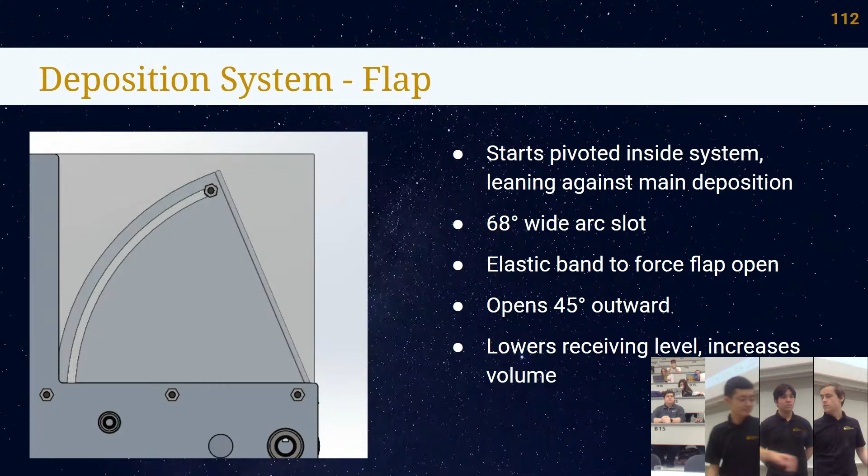Alex asked: when the flap is open, does it go underneath the deposition system, or what is the alignment of the two systems? I believe the flap is slightly underneath the deposition system, like at the corner. One of the first couple of slides shows this - I'm not going to flip all the way back there, but the flap ends up sort of aligned below the top of the other wall, which should help with the transfer as well.

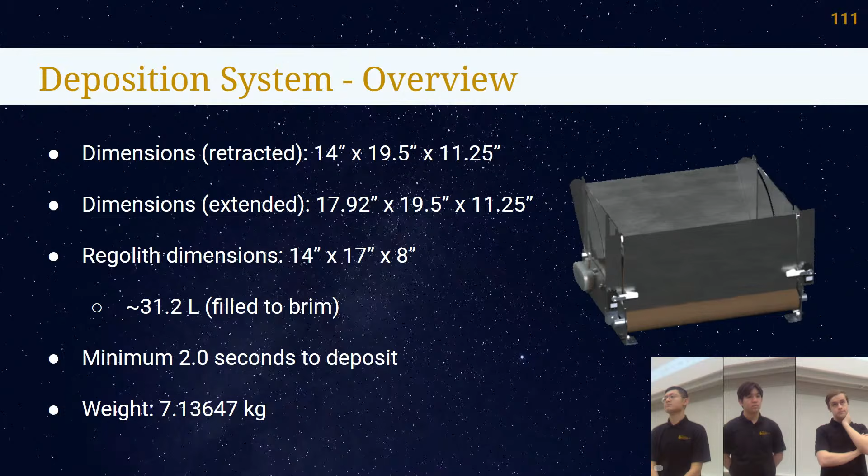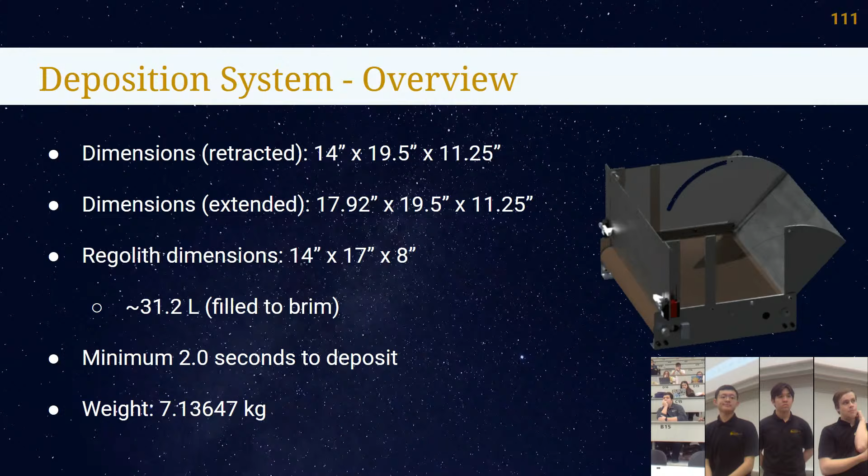If they do, I don't think... if the bots hit, then the bots hit. Yeah, if the bots hit, I don't think it would be that big of a concern. No, well...

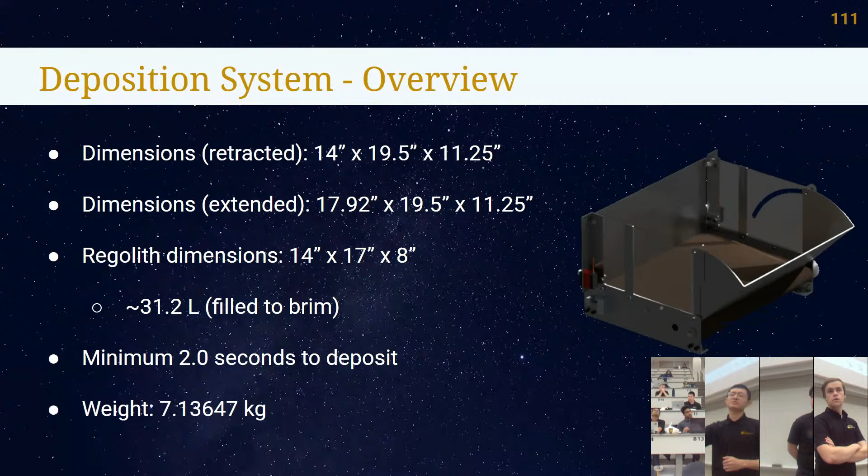Does the flap act as a kind of bumper? Like if the main bot were pressed against it, would it retract? It probably would, yes, depending on how far the flap has opened. When that flap opens enough, it's at an angle in which it shouldn't come back in the same way it started, if that makes sense.

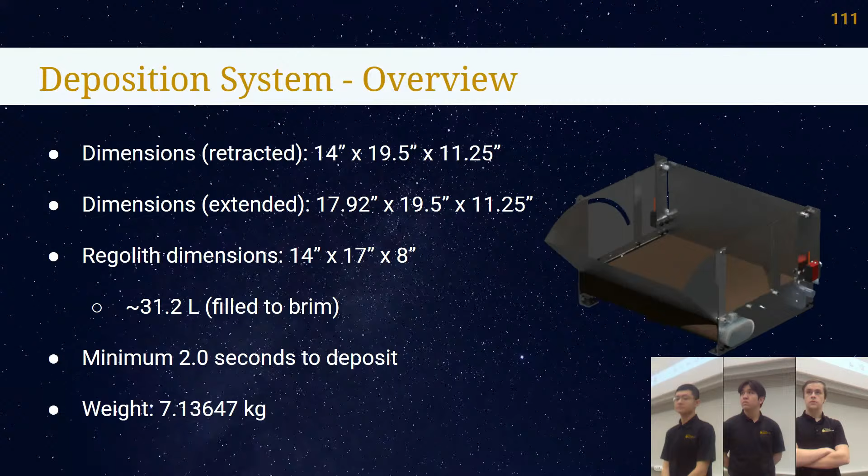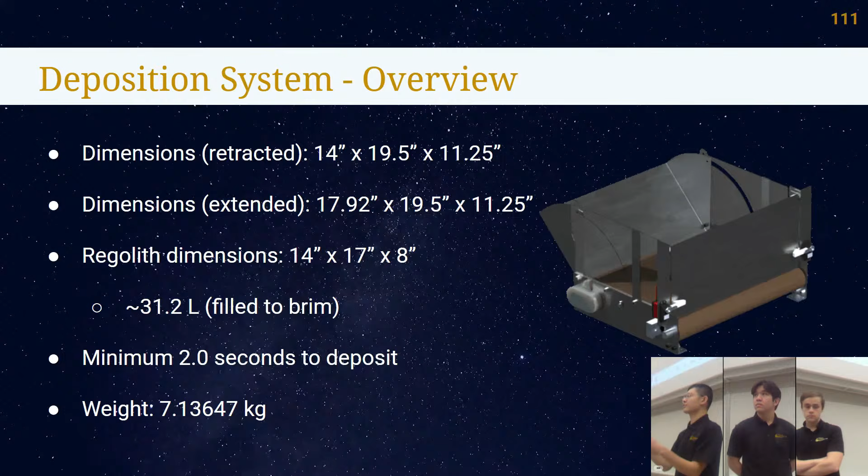So is the rubber band keeping it closed or open? Open, at 45 degrees. So in what instance would we need it closed? At the start of the match, to be within starting volume requirements. It lets us get mini depth kind of under main, and it shrinks our bounding box a little bit. So for anyone on the live stream, the question was: when do we ever want the flap closed? The answer is at the start of the match, so we're within initial bounding volume conditions. Then it expands out and remains open for the rest of the match.

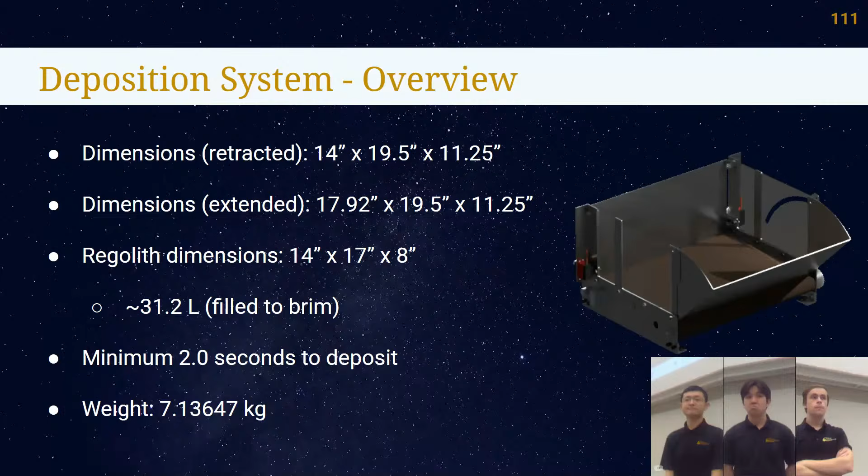Are there any other questions? All right, perfect. I believe that concludes the mini bot deposition system. We move on to the drivetrain system.

Did one of you fall? No, it's just...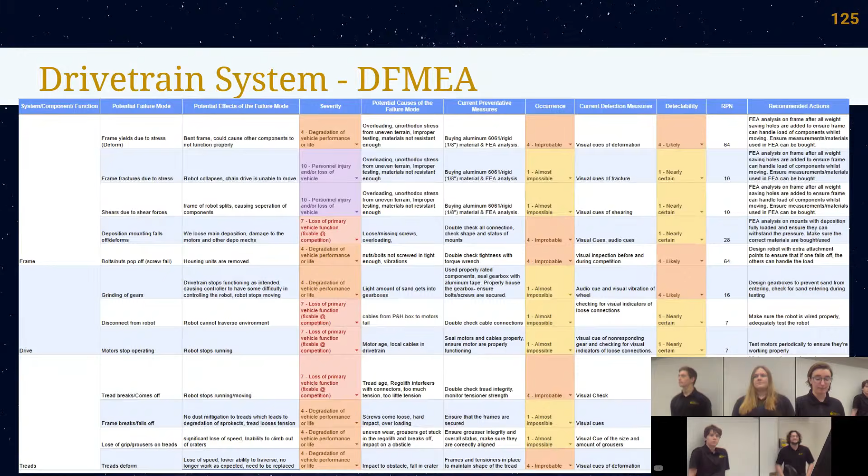Similar solutions were taken as mainbot for this. Plan moving forward: implementing any CDR advice, working on different weight saving especially in frame pieces, ordering stock, manufacturing, and assembling. The goal is to have Minibot drivetrain assembled before mainbot drivetrain is assembled, so that with treads we have time to figure out if there's any other issues when we are working with those. Any questions?

Will had his hand up first. When it comes to essentially the treads, is this something in the process where we're going to take off the treads for, or is this going to be done with the treads on? Treads can stay on. How it'll work is we'll have this bolt here in this nut, so we'll have to take off the outer plate and then tension them, and then it'll be fine.

So I guess this is just confirming, we have access to a printer with an enclosure to print the treads. Our printer can do that. We do have it. Got it. We do.

So I'm wondering, if you take PAHT-CF, was that it had a very strong layer adhesion for a CF filament? What is the non-CF variant of that filament, and is it a better filament for us? Yeah, so these are compared here with PLA. PAHT-CF is only slightly worse layer adhesion than PLA, but if you look at like PET-CF, that is much worse, same with PLA-CF. My point is that looking at PLA and PLA-CF, PLA appears to be just a little bit weaker than PLA-CF, especially in toughness and layer adhesion.

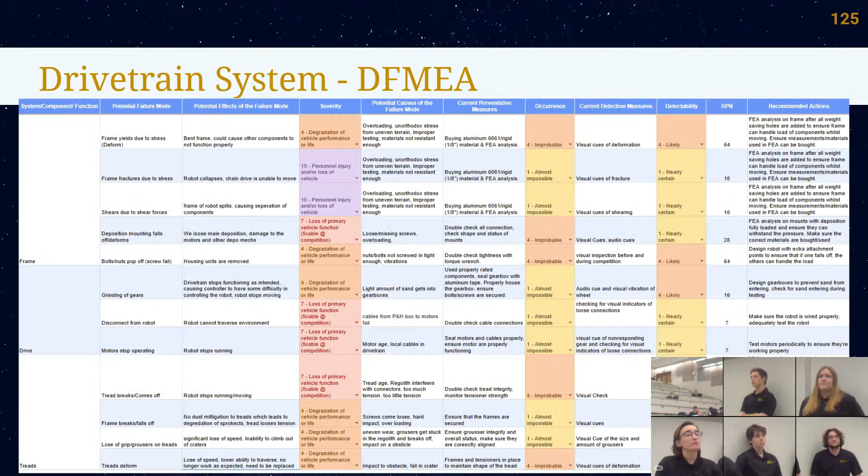So just to give you a specific number, right now the center of mass is about 19 centimeters above the bottom of the treads. And how wide are the treads? Like how wide are the tread pieces, like what's the length of the treads, center to center on the bottom probably?

What's the width of the robot? Is that what you're asking? Length. That would be 13. Total base of the treads is about 60 centimeters. Yeah, it's 60, the center of mass is 19 up.

It probably will move like 25 or 30 with a whole container of regolith because of how high all of that is. So that would be just straight — I think 45 degrees, no tip — but I might be wrong on that, depends. It might be shallower than that because the back end of the treads are closer. Like how far away is the closest center axle of the tread to the center of mass? That's what's going to be your tipping risk.

That's the center axle, the tread? Yeah, like the center of the axle. That's gonna be what you're pivoting around. Okay, so like this to the center of mass. Yeah.

Those are probably going to be what causes your tipping angle. Andrew, do you have the CAD pulled up?

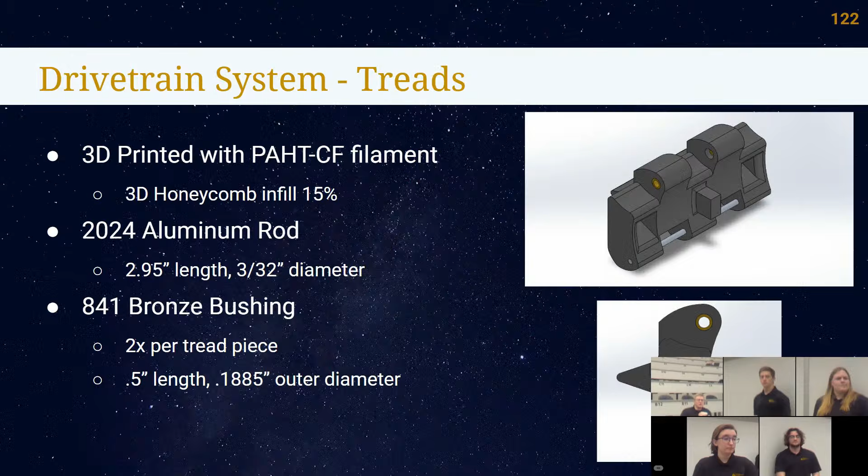Buckling or warping of the tread mounting plate? Yes, there were concerns for both of those, which is why it's a quarter inch thick, even with the weight changes we were trying to do. We're going to look at doing FEA on those plates to see if it's possible to get weight saving holes, because that will have much more impact on weight than thinner plates. It was looked at changing it from quarter inch thick to an eighth inch thick, but it's believed that will buckle or warp, which is why it's being left at quarter inch thick.

One suggestion, and this kind of goes for all mechanical teams: if you have a thick piece, especially metal, you don't have to do a full hole through it. You can just shape it down to like half inch or half thickness, so that way you can still retain some of that full strength. Okay, we'll look at doing that.

Building on that question, my understanding of the tread assembly is you have an outer plate, tread stuff, wheels and treads themselves, a backing plate, and then the frame. How is that backing plate attached to the frame?

The mounting plate is attached to the frame with these four holes, which can be accessed when you take off the outer plate. So if you wanted to pop off the entire wheel assembly, you can do so just by taking off those four bolts. I don't think we have a great picture that shows it, I'll be honest.

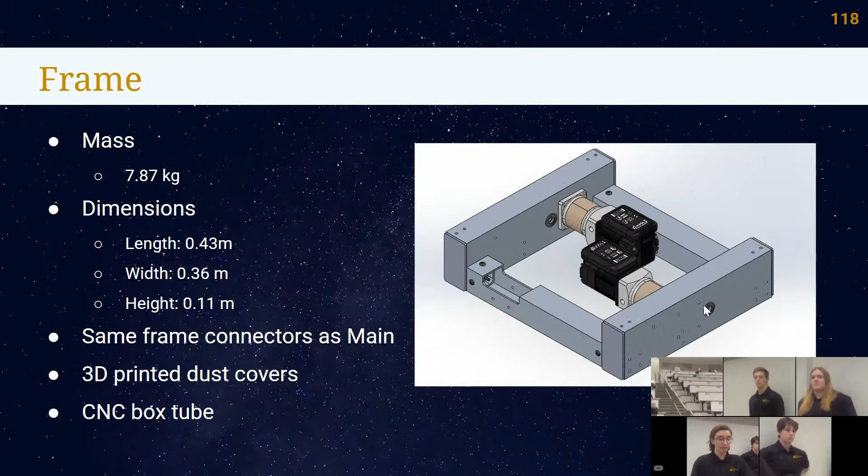Do you think those four bolts are strong enough to hold that on, and/or would adding more bolts mean that side plate has to take less load and can dump more load into the frame itself? I don't think adding more bolts will help, because of where those four bolts are located on the frame. Like where those bottom two are, is right here.

So you wouldn't be able to add any bolts lower. I think that's the only other spot. If you could add them lower on that tread mounting plate, that would help with load, but you can't attach that to the frame, so it's a moot point there.

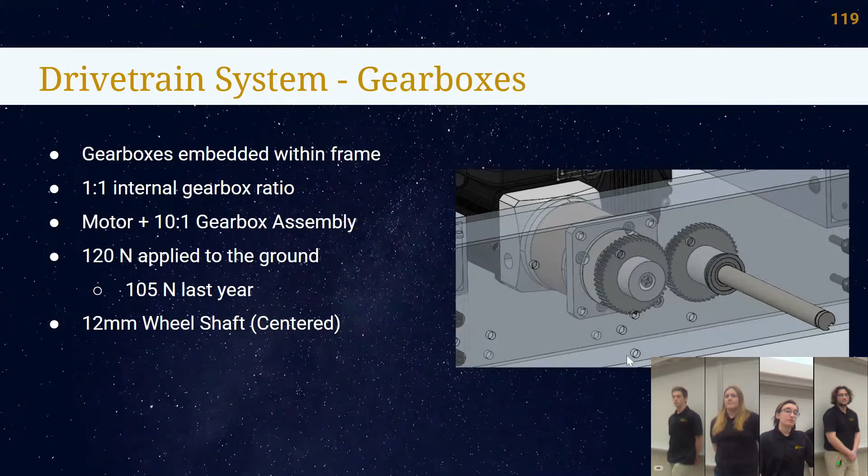But could they be attached more off to the right or something? No, that's because of how this is designed. You could do another flap out to here.

Could one be hiding in between the tensioner sprocket and the drive sprocket? Could you put a bolt in between the tensioner right there? We looked at doing a standoff in that location. You could probably do a bolt in that location if you wanted to.

That could help with forces, but I still don't think you'd want to decrease the thickness of the mounting plate just by adding that one screw. The only thing is that would have almost half an inch of aluminum between the box tube and the mounting plate. They're back to back to each other, which is a lot of aluminum.

It's 3/16, or not 3/16... 5/16? What is that? Wait, math. Yeah, it'd be 3/8. But 3/8 is still a lot of material, and to my knowledge, very little on the robot is that thick.

I think we'll see a lot of forces in this area if and when the minibot hits a rock or any obstacle. More than the main robot drivetrain frame? The main robot drivetrain frame is different because of how it's mounted - the gearboxes are mounted on it.

That still seems like a lot of material, and I understand there's a lot of forces, but it doesn't seem to warrant being, I think, the biggest material that we have on the entire robot. It is definitely the heaviest single plate on the minibot. I think it does warrant it, but yeah - that is, I believe, a similar strength to the excavation mounting, which I've also been looking at.

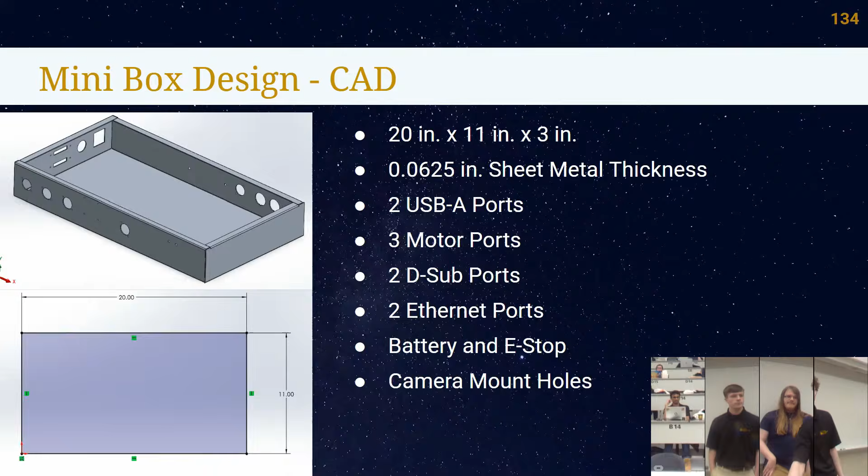On the breakers, you said you have 15 amp breakers for mini. What are those breakers powering? I would have to go all the way back, I apologize, to the breaker layout. I can't remember off the top of my head. Like I said, I would probably need the layout.

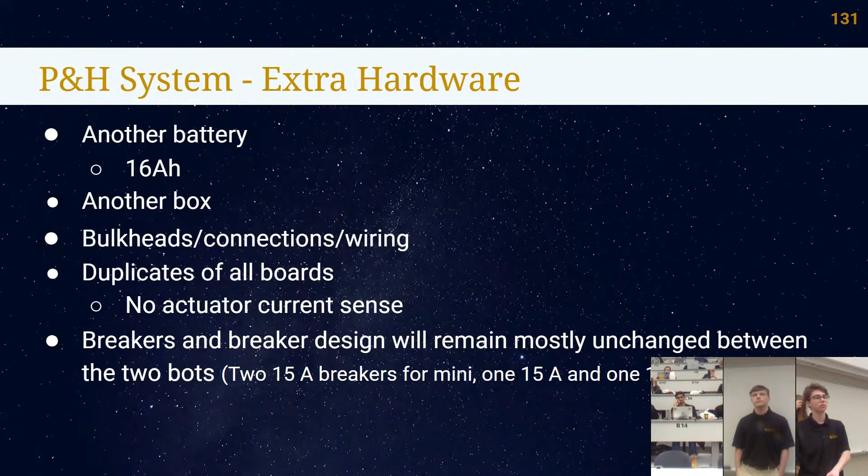Not the actual wire, but literally what is connected downstream of them. Are you connecting the drivetrain motors downstream? Are you connecting the minis from them? What are they connected to? Yes, if I'm remembering right, they were for the extra motors, because I believe we're using more heavy duty motors on the Minibot due to it having to move around more.

If we do end up using a different battery size, are the battery protection circuits able to handle different size batteries? Are we using the same one on both components? Yeah, the battery protection circuit should be able to handle between the two batteries. They're designed for that.

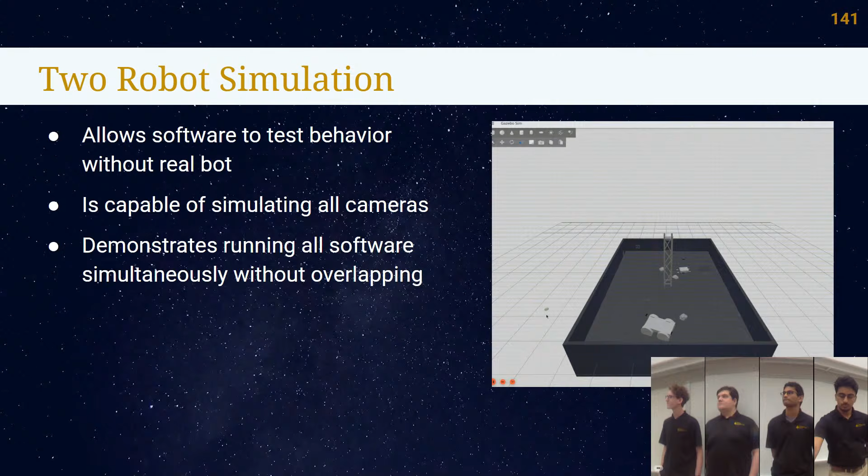About the LiDAR, which we don't quite have yet, do you already have mounting for it planned? Yes, and there are holes created for that on the box. There's documentation, this should fit well. If it doesn't end up showing up, or if we don't end up using it, we do have cameras there already. We might want to add another camera for a bit more visibility, but we'll look into that when we get to that point.

What's the actual control scheme for this, in manual setting? Are you switching between them, or do you have two controllers? The current plan is that we would have two controllers, and we're able to control each of them individually. We have three people in the control room, so one person would be working on each robot, and the third person would just be there to manage the whole thing.

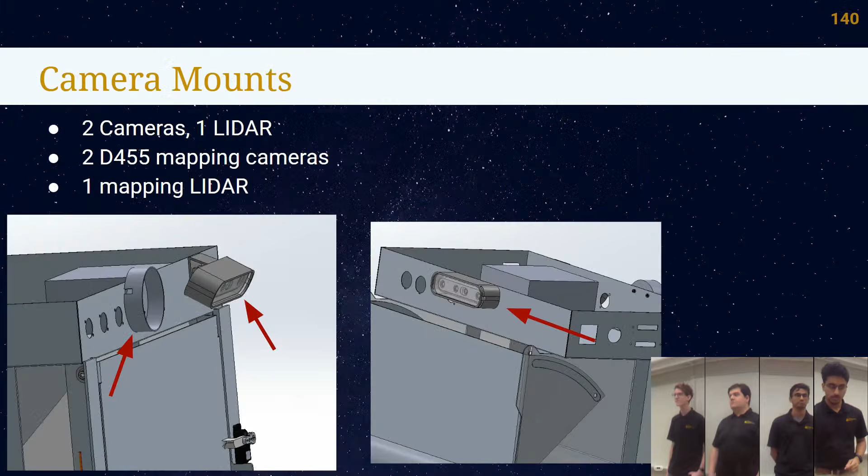That's it then, I think we're good. Does anyone have any more questions?

Okay, a couple more last little things before we're done. Upcoming deadlines and dates: February 4th is team photos and NASA media release due. If you are in the team photo, we would like a media release for you so you can be in the roster, and we can tell NASA that you're here. STEM industry plan is due the 26th, that's a fun project for me and systems, we get to write out all the cool stuff we do and condense it to one page of writing. The next big thing is March 20th, presentation and demonstration due. For those who do not know what that is, we have a date with NASA and we tell them all about our robots, and hopefully show them part of our robot or a working robot or something about a robot.